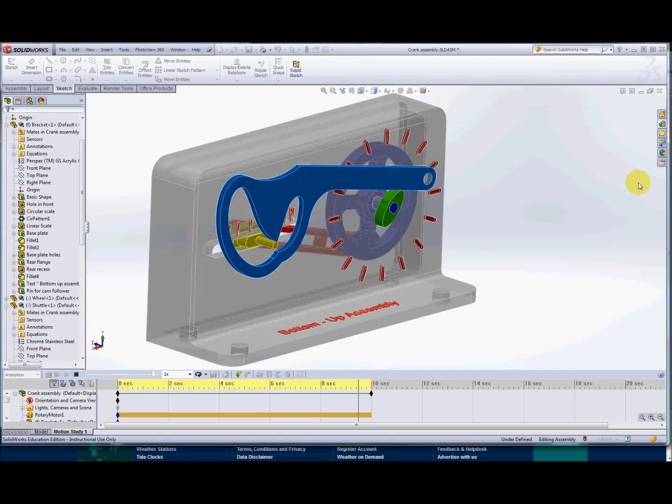So what we're going to do today is create this crank assembly. We're going to use the bottom-up assembly technique, which means we'll start off with existing components and then just put them into the assembly and relate those components to each other using assembly mates.

Okay, so what we're going to do first is create a new assembly. Once the assembly has opened up, you'll see that it prompts you on the left-hand side to browse for existing parts or assemblies to add into your assembly. In this case, we're going to browse and find the bracket. The bracket is the main part that all the other parts are going to be attached to, so it makes sense that we put that one in place first.

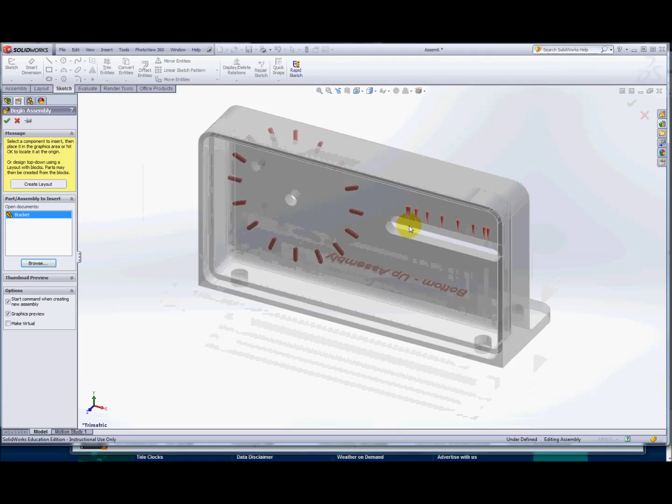Now, what it will do is prompt you to place the component somewhere. If you just click there, it'll place it fairly randomly. If you go over to the left and hit OK, it will place this component directly over the origin. So if I show origins, you can see them there, and it will place the component over the origin of the assembly.

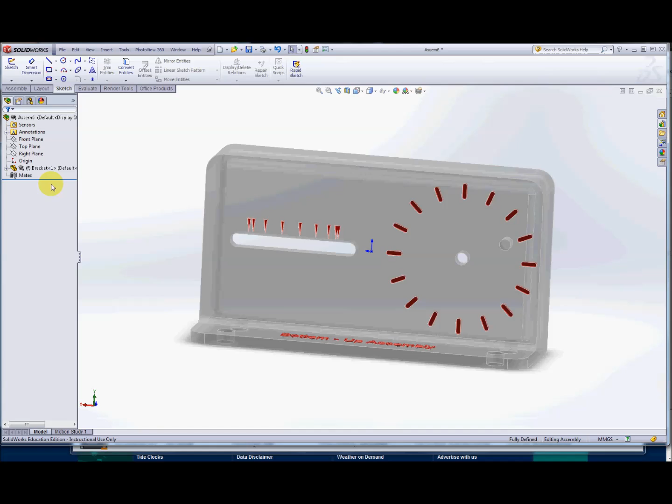Okay, if you look on the left-hand side, you'll see there's an F next to the bracket. That F means that this component is fixed. So if I try and move it around, I won't be able to. There are two states with components in an assembly: they can either be fixed or floating. I don't know how you remember which F stands for, whether it's fixed or floating, but it does stand for fixed.

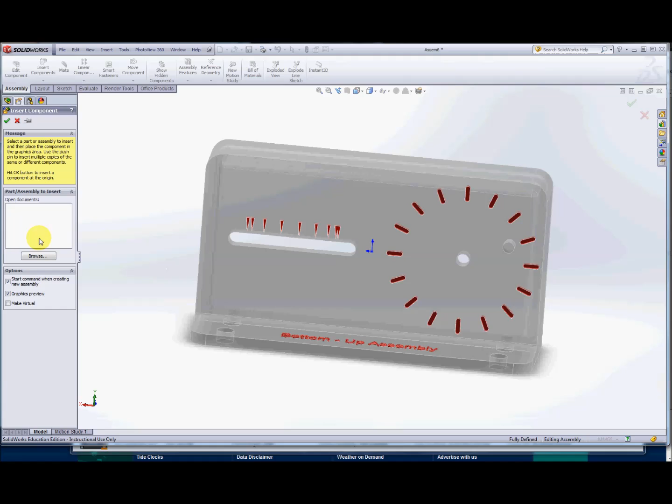So the next thing we're going to do is insert another component into the assembly. There's a couple of ways of doing that. You can either select insert components from here, or go up to insert component on the drop-down menu tree. Whatever way you do it, just select a new component and browse for that component. The first thing we're going to put in place is the wheel. So select the wheel and hit open.

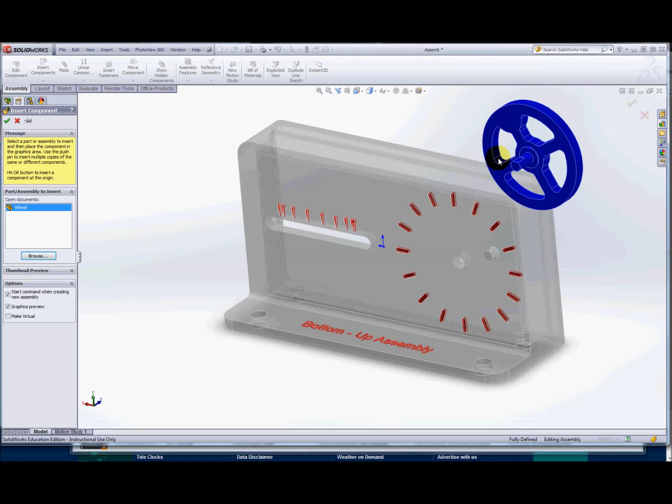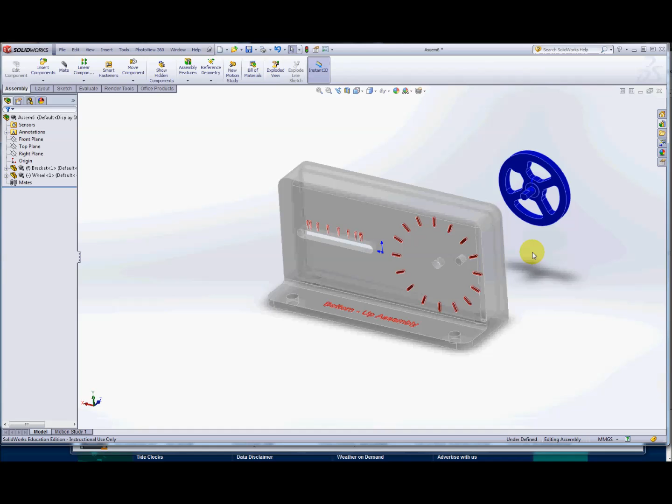Now again, it's prompting you for somewhere to put this component. The best thing to do is just leave it away from the rest of the assembly and click. Wherever you click is where the component will be dropped. But if you then hit escape and select the component again, you'll find that you can drag it around to wherever you want. That's a way of temporarily getting a component close to where you want it.

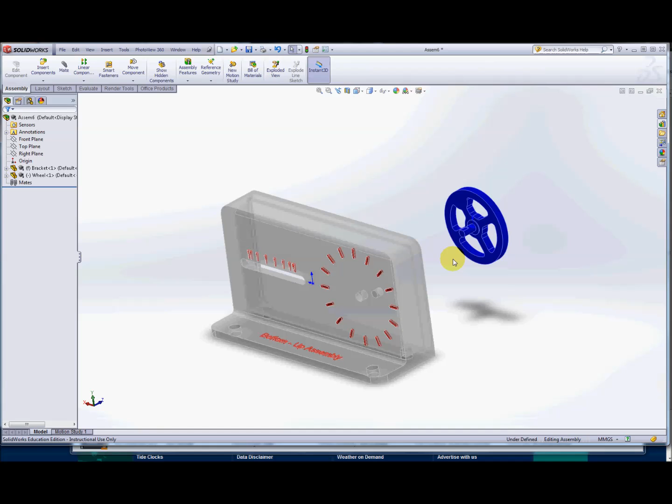But what we really need to do is link these components using what's known as assembly mates. Assembly mates just make relationships between bits of geometry on two different parts so that they're aligned with each other. So for example, the pin that goes through this axle that goes through the wheel will be located in this hole here.

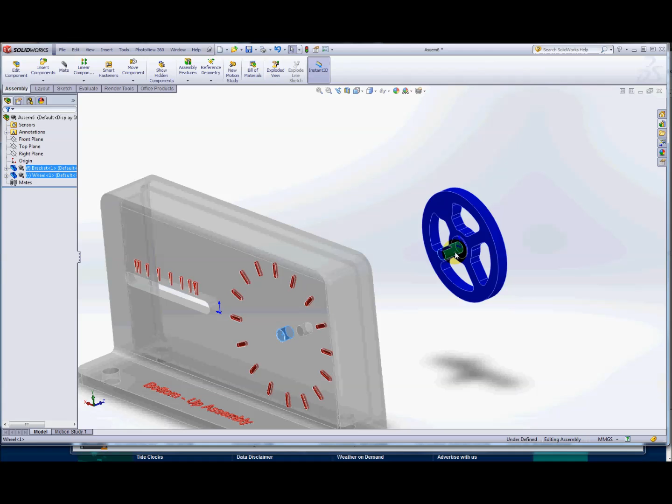So the way that we do that is we select the face of this hole, and we select the face of the axle. Be very careful to make sure you select the faces and not edges, and then we select the mate command.

Now on the left-hand side you'll see that it will be prompting you for the faces that want to be mated together. Once those are selected, it will try to work out what the most logical type of mate is to be selected. In this case, because we've selected two cylindrical faces, it's decided that concentric is the most logical mate relationship. Concentric simply means that they share a common center, and those cylindrical faces are now lined up.

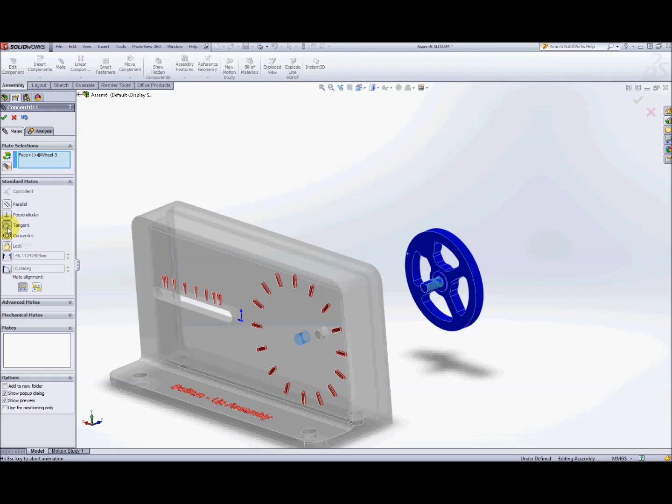There are other options. We could have tangent, so if I select tangent, you'll see that the component moves slightly, and I'll just demonstrate that. So that's the tangent mate, and that's the concentric. So once you've completed that cylindrical mate, if you try dragging the wheel, you'll find that it can rotate and move in and out, but it will always maintain that cylindrical concentric mate relationship.

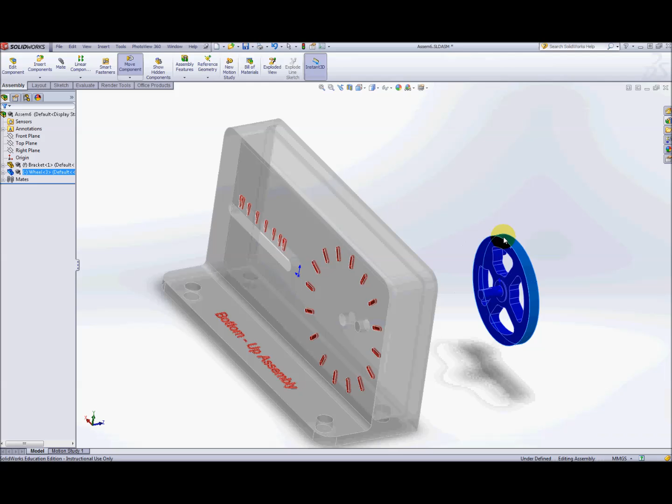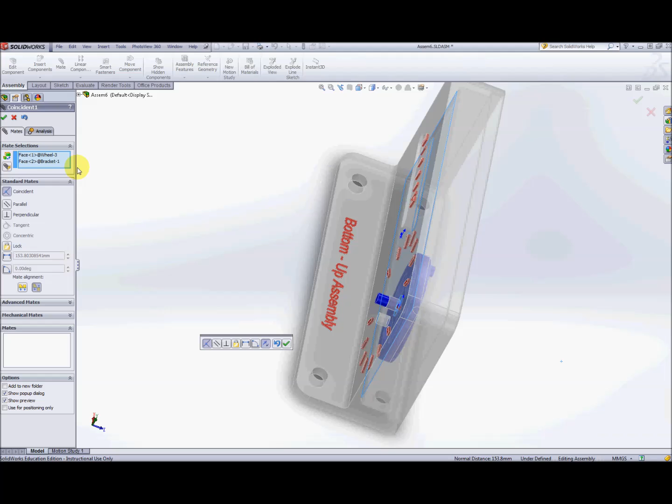So the next thing we need to do is make a mate relationship between this face here and the back face of the bracket. If you control select both those faces and go to mate, it will assume that you want to make a coincident mate. Coincident simply means that you've got two faces that coincide with each other, hence coincident. So hit OK, and now you'll find that the wheel is positioned, and it still can rotate, but it's positioned in the right spot and concentric with that hole.

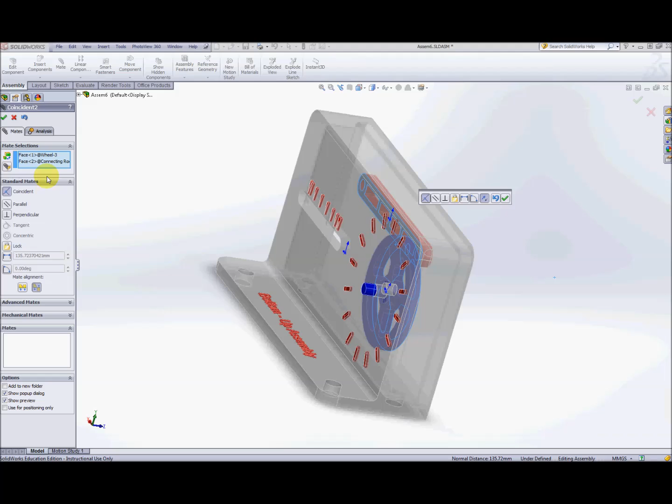So the next component we're going to put into the assembly will be the connecting rod. So again, search for the component, select the connecting rod, and the easiest thing to do is drop that on a spare bit of space away from everything else. What we want to do next is make that face there, control select that face, and make a mate relationship between those two faces, make that coincident, and hit OK.

We're going to spend a lot of time now just creating mates, so I've selected those two cylindrical faces, create a mate between those two, and now we'll find that we have the ability to move this, but of course the connecting rod is only attached to the wheel and nothing else.

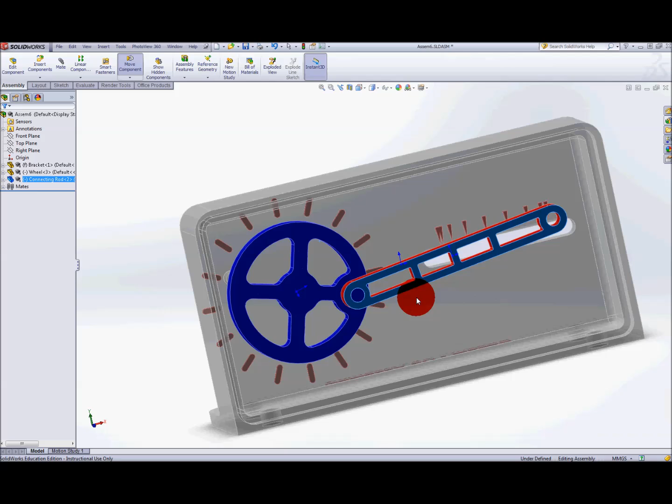So the next component we want to put into the assembly is the little component that goes backwards and forwards, which I've called the shuttle, and that's this little yellow component. So again, plonk it there.

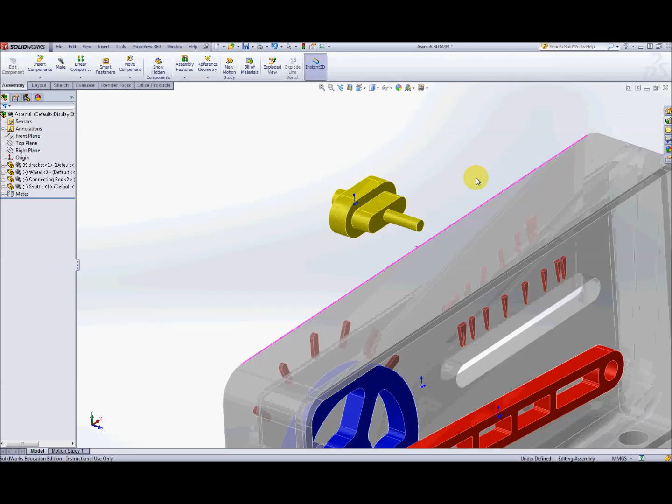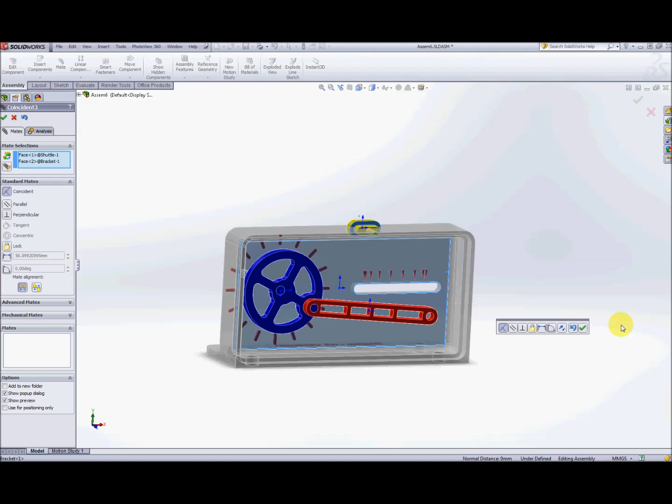This time it's put itself the wrong way round into the assembly. So what we want to do is make a relationship between that face and the inner face of the bracket. If we go to mate, you'll find it moves to where there's a coincident mate between those two faces, but that's around the wrong way. That's not what we want. We want the reverse of that.

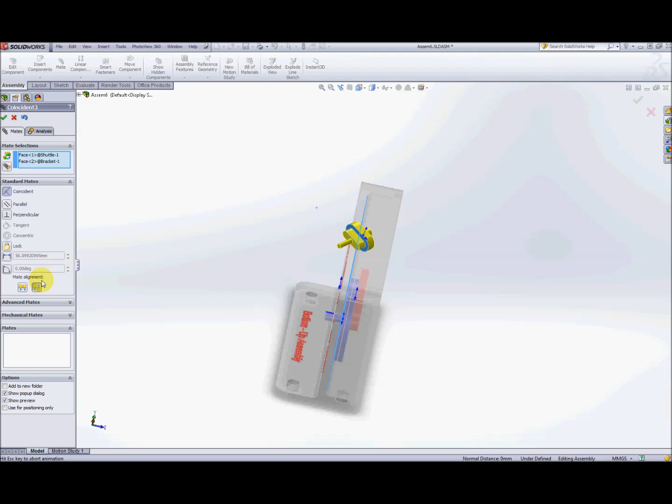If you go to the mate alignment tab here and select that, you'll see it just turns the mate around the other way. So to show you that again, it just flips the mate into the other side, which is exactly what we want.

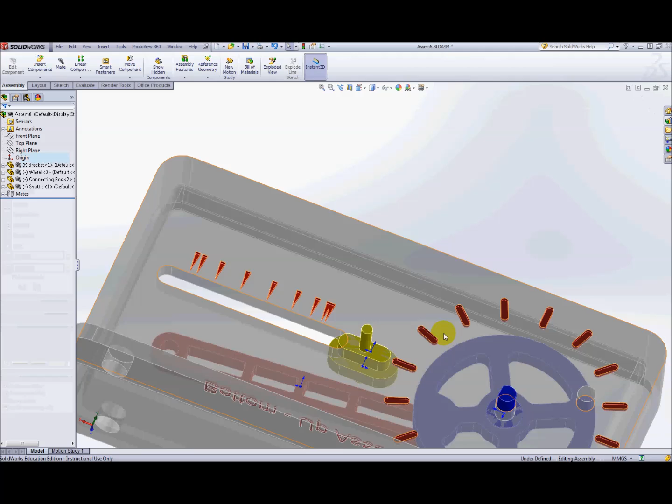The next thing we want for this component is a relationship between that face and this face here, so that it'll slide backwards and forwards. So we do that, and there we have it. As a general rule of thumb, if a component has two mates on it, it will allow some degree of movement. Generally, if it's got three or more, it's quite restricted. Not always the case, but as a rule of thumb.

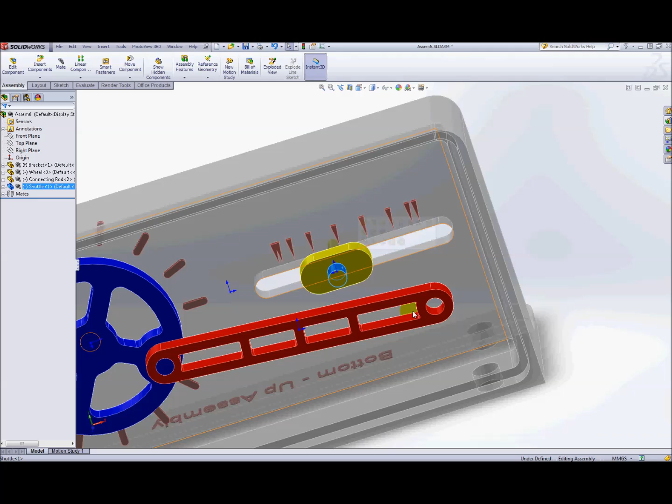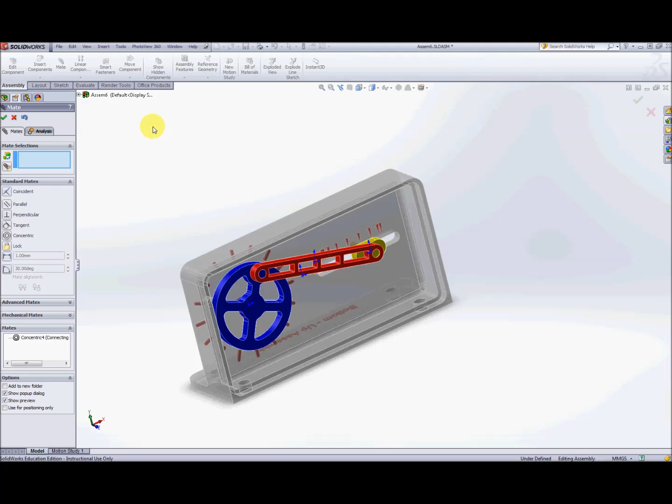So now we just want to make a relationship between these two cylindrical faces. Again, go to mate, and there we have the slider positioned. Now if we rotate this, you can see the components move exactly as wanted. If any of those mates were missing, things wouldn't run smoothly like that.

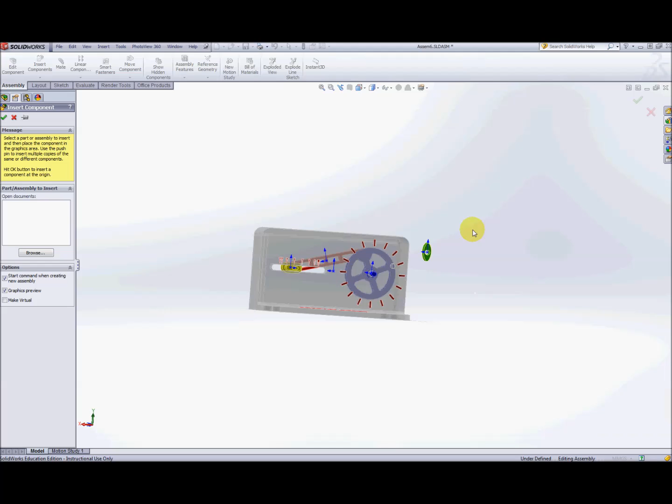Okay, a couple more components to insert. If we go to bring in the cam, that's probably the next one, put that in place. I might just go straight and put in the final component as well, which is the cam follower. So open that up, and that goes there. The little cam piece sits on the axle of the wheel.

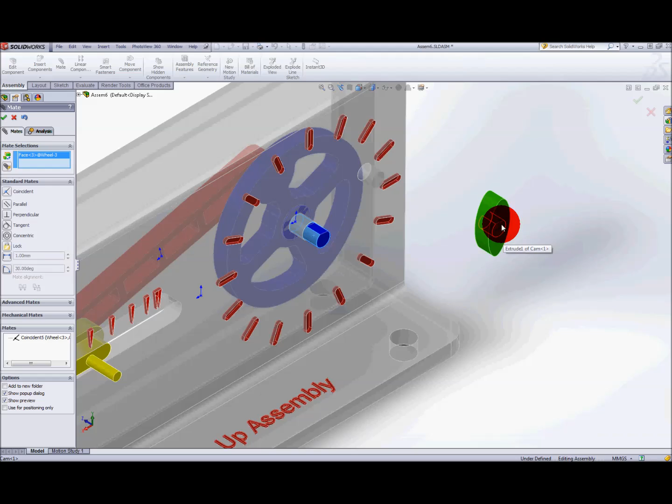Now you can see there's a little flat, so that little flat needs to be aligned with that flat there. So you select both those two faces, go to mate, and that's got a coincident mate, and then we go to the cylindrical faces, and we have a concentric mate attached to those. And then the final thing is these two faces want to be coincident, and there we have it.

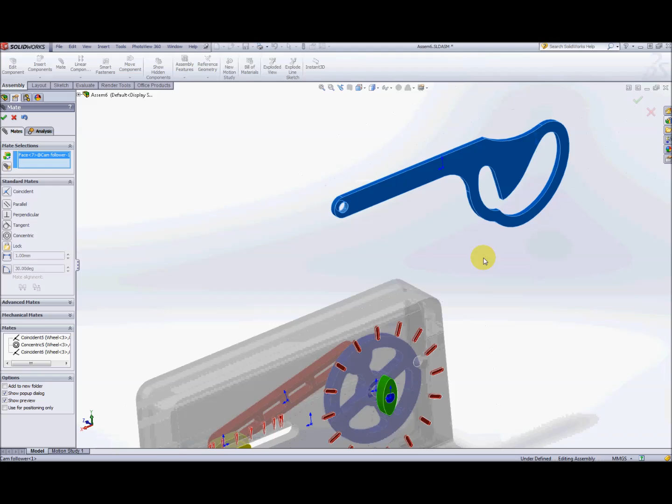So the final component to be mated in place is this one. Now this pivot hole goes over the pin on the bracket. Again, that's around the wrong way, so we need to flip the mate alignment like that.

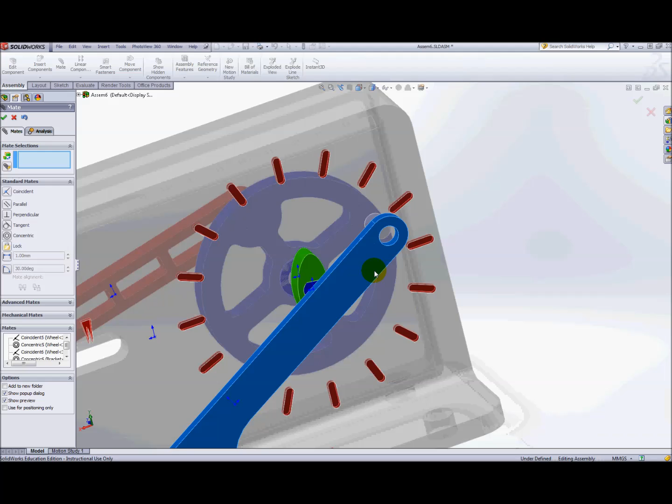The next thing we're going to do is make a relationship. Sometimes it's a bit tricky getting the right faces, so we want that face and this face to be aligned.

Okay, so far we've just been creating simple mates. This final mate we're going to put in place is a slightly more complex mate. Down the bottom here we have advanced mates and mechanical mates. What we're going to do is just select a mechanical mate. We've got some options here with cams and gears and rack and pinions and so on. This time we're just going to use the cam, so we're just going to select that cam.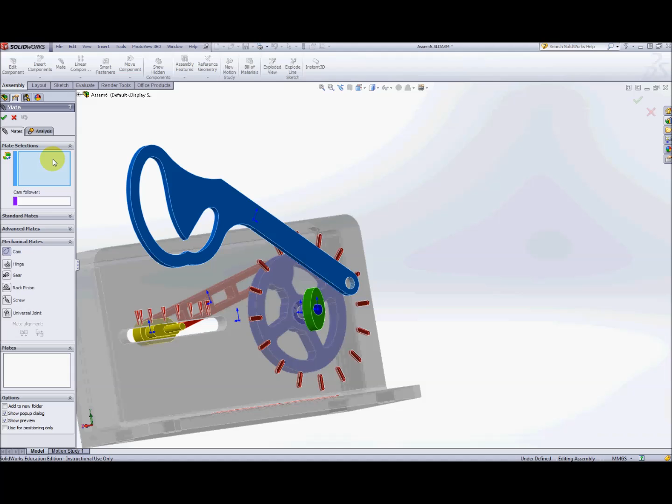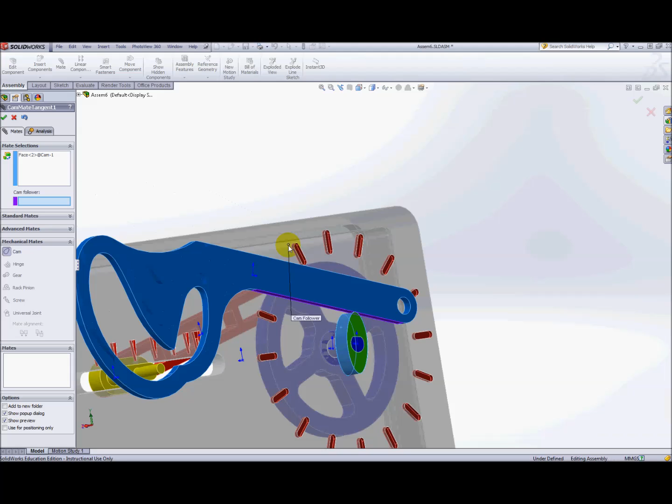Again, it prompts you for a face to relate to, so we're going to select this one here. And then it asks for the cam follower. So the cam follower, oh sorry, I've done that around the wrong way. For the mate selection, you want to select this cam face, and then you select the cam follower, which is this face here. And you'll see that now these faces will always be tangent. So this is a tangent cam.

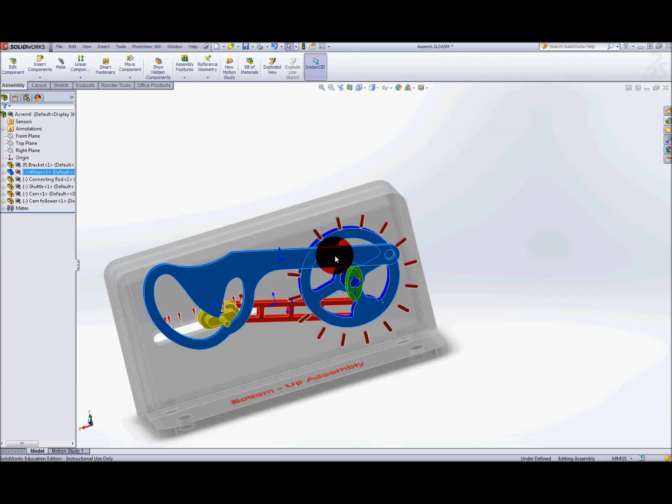So there we have it. Now what we can do is grab hold of this component here and rotate it, and you'll see that now the entire assembly moves the way it should move. So there you have it, bottom-up assemblies.

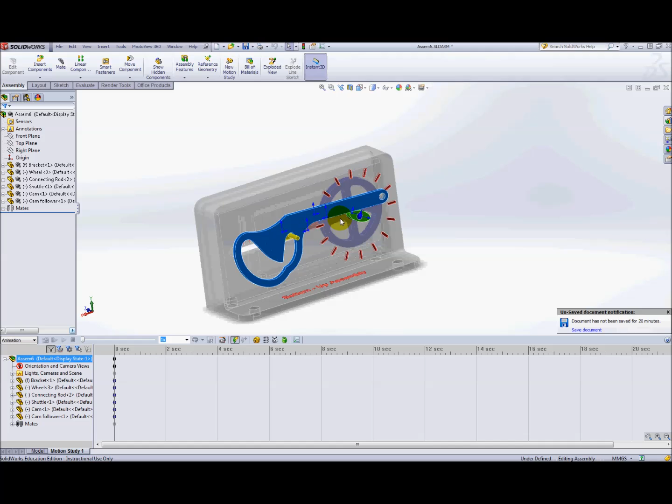The final thing you can do with this assembly is create a motion study. Down the bottom left hand side you'll see there's a couple of options, two tabs, one's for model, one's for motion study. If you select that, we can add a variety of different things, from springs to cams to gravity, but one of the simpler things is to just add a motor, and this is the motor control. If we select that, we've got an option of a rotary motor, a linear motor, or an actuator.

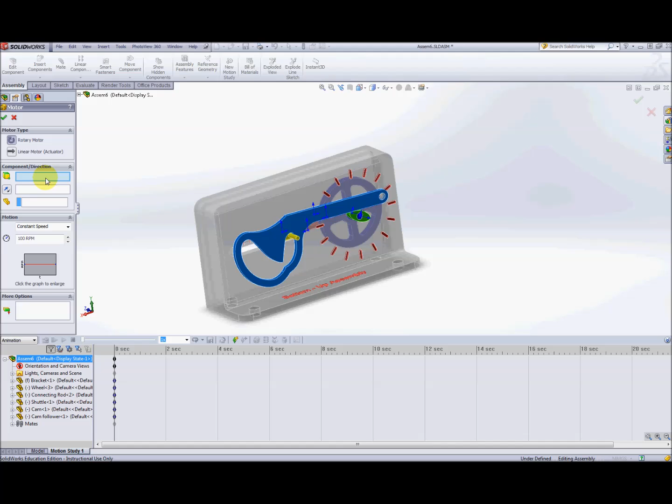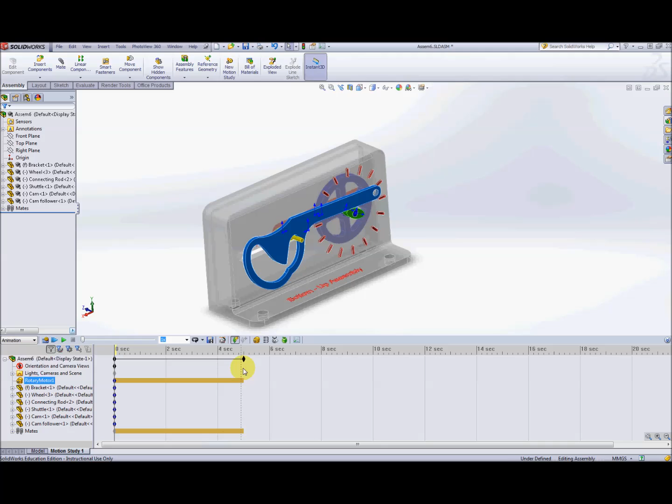What we can do is just want a rotary motor, so we want to make that wheel rotate to make everything else rotate. We select a component direction, and you can see there's a little red arrow that tells us that's the direction we want the wheel to rotate in. We can select the speed of the motor, with a constant speed or a whole variety of options. Let's just keep it simple at 100 RPM. Now we can also increase or decrease the amount of time this sequence goes on. We can have other components doing other things, but let's just keep a very simple one for now.

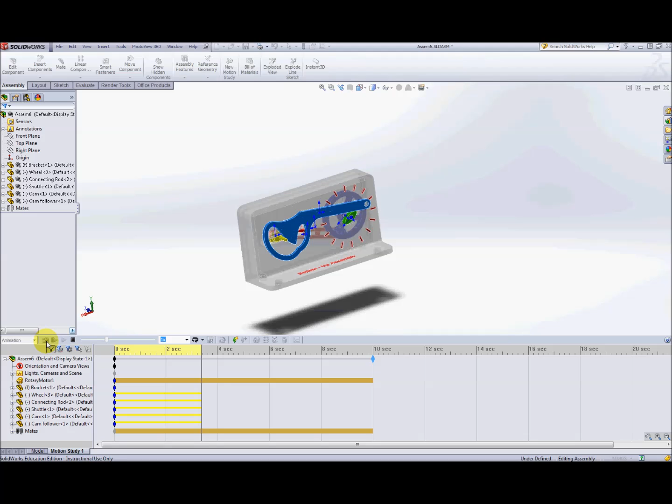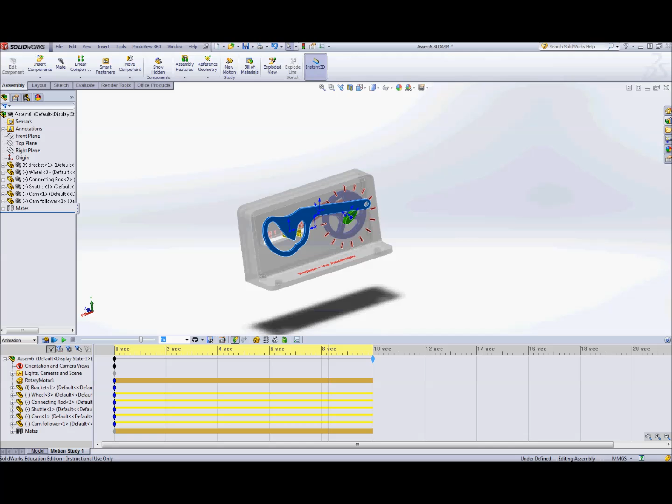Go to where it says calculate, and it'll calculate what happens with the motion as that wheel is rotated, and there you have it. There's a couple of options for the playback loop. You can have it so it just plays back once and stops, or it plays back in a loop, or it plays backwards and then forwards and then backwards. Once you have an animation you're happy with, you can save this animation as an AVI file so that you can incorporate it into a presentation.